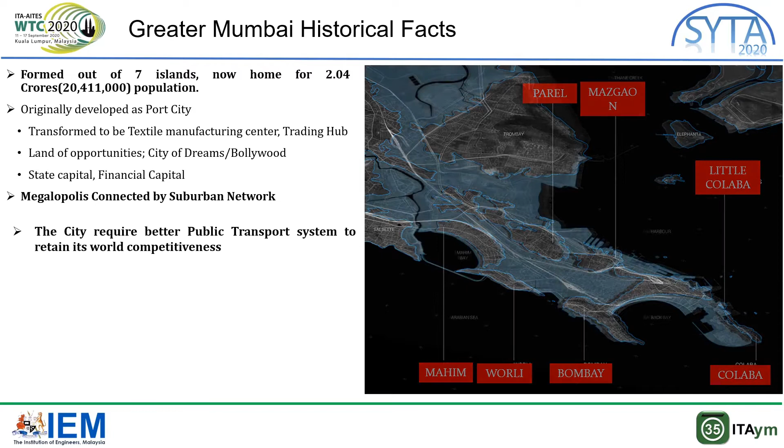Let's see the status of existing public transport infrastructure in Mumbai. Mumbai has a suburban railway network system with 465 kilometers of track length. 2,800 trains run on the system, serving 131 stations, supplemented by an integrated bus transport network system. The rail network carries around 8 million passengers every day.

Rail traffic has increased 7 to 8 times, but capacity has only increased 2.3 times, so the rail network is running over capacity by approximately 5 times. More than 2,500 people died and over 3,000 people were injured in Mumbai's suburban railway network, according to data compiled by Mumbai's Railways Police Commissionerate in 2019.

Similar condition is also seen in the road network system. There is a 56% growth in city's vehicle count from 2012 to 2017, approximately 35 lakh vehicles increased on the road. Hence, there is an urgent need for an international quality mass rapid transport system in the city.

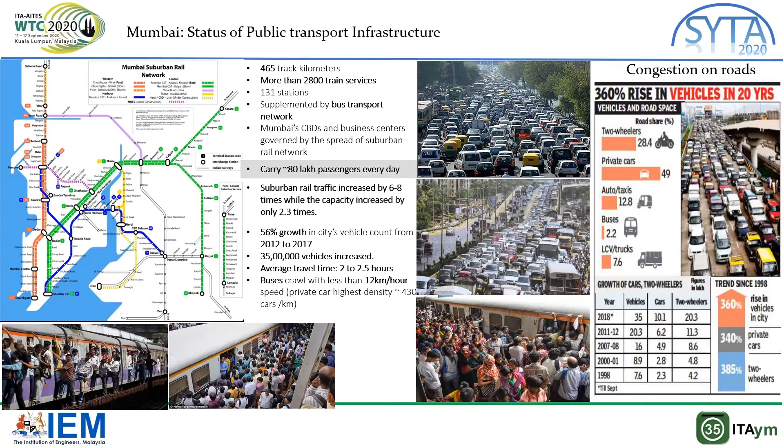Let's see the benefits. Connecting the unconnected is our motto in Mumbai Metro Line 3, as it connects all the major central business districts such as Nariman Point and Cuff Parade. It also connects areas which were not served by suburban railways. It will connect the airport, both domestic and international terminals, and will have interchange with existing public transport at various locations. Once Metro Line 3 is completed, it will connect 30 employment clusters, government and private offices, 12 educational institutions, 11 major hospitals, and 25 religious and recreational structures.

The most important benefit is environmental, as it is going to reduce traffic by 35%. There will be 4,56,771 fewer vehicle trips per day. There will be reduced fuel consumption, saving 2,43,390 liters per day. As per the study, there will be a reduction of air pollution by 2.61 lakh tons per year.

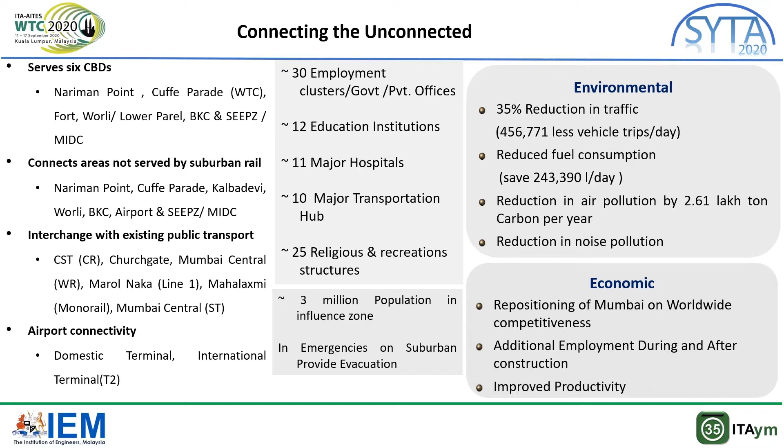Mumbai Metro region - the first picture on the left shows the plan for development of all metro lines proposed in the Mumbai Metro region. Only Line 1, Versova-Andheri-Ghatkopar, 11 kilometers, is in operation as of now. All other lines are in construction or planning phase. Once completed, there will be a total of 357 kilometers of metro track in Mumbai. The picture on the right shows the alignment of Mumbai Metro Line 3, which starts from Cuff Parade, Colaba, passes through Dadar, Worli, Dharavi, BKC, and ends in Aarey.

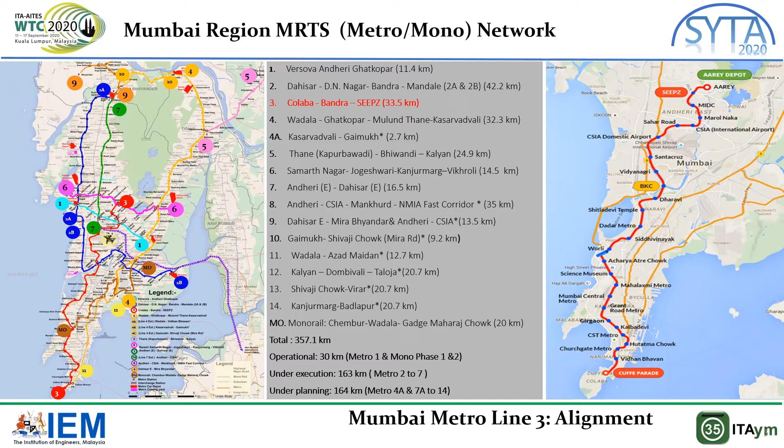Scope of work and project management: it's a 33.5 kilometer completely underground network consisting of 26 underground stations and one at-grade station at the depot in Aarey. Its civil cost is approximately 23,137 crores, out of which 57.2% is provided as a soft loan by a Japan bank, and the rest is contributed by the Government of India and Government of Maharashtra.

In December 2021, the first phase of the network, from BKC to SEEPZ, will be implemented, and the rest of the network by June 2022. We are expecting a ridership of around 14 lakh in 2021 at its starting.

Project management: we have a full in-house team of MMRC, and we have appointed a general consultant, which is a consortium of AECOM, Louis Berger, Egis Rail, and Padeco as engineer. And then there is a full team of contractors with detailed design consultant and design checkers.

We have divided the entire line into 8 packages, including the depot, consisting of 55 kilometers of tunneling using 17 different TBMs launched at 11 different launching shafts, internal and external. There are 26 underground stations, out of which 7 are off the road and 19 metro stations are below the roads, in which 7 stations are done using the NATM method and the rest will be cut and cover.

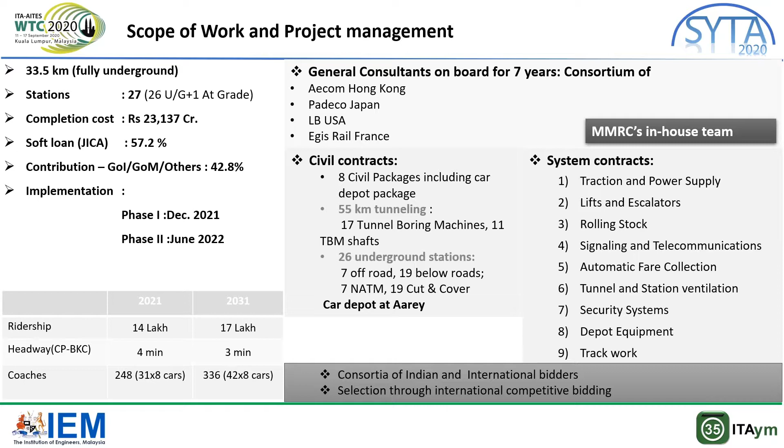The 7 packages have been awarded to 5 international bidders: L&T STEC JV, HCC Most Metros Troy JV, Dogus Soma JV, CEC-ITD-Tata Projects Limited JV, and J Kumar CRTG JV.

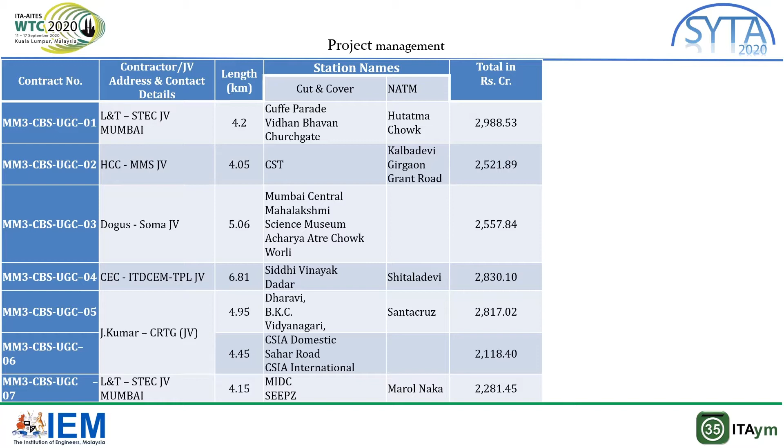According to Dr. Sreedharan, also known as Metro Man of India, this is the most difficult, most challenging, and technically the most complex metro project the country has undertaken. One should consider themselves lucky to be associated with this project.

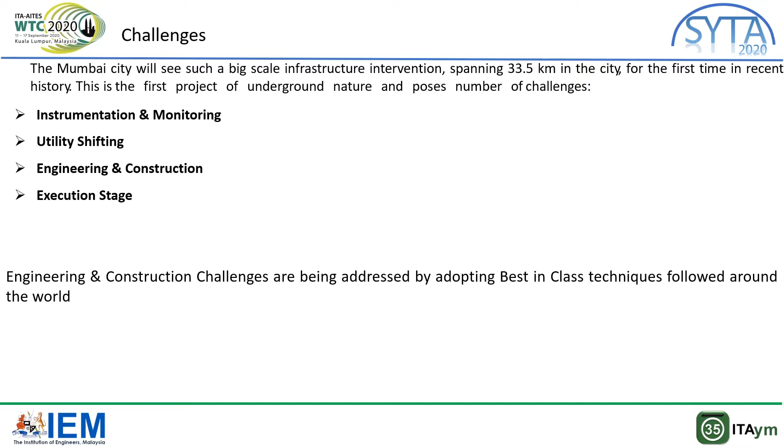Dr. Sreedharan has changed the face of public transport in India with his leadership. There are numerous challenges in the work in Mumbai. We will discuss a few challenges encountered by us. During the course of tunneling, numerous challenges were dealt with using the technical expertise available.

Structures above the ground were on average aged around 75 to 80 years, with maximum age of some structures being more than 120 years. So more than 3,000 structures were surveyed and are under monitoring for the line.

For instance, in package 2, out of a total of 1,004 structures in the influence zone of the tunnels, 51 were heritage structures, including places of worship. 28 were in severe condition, 238 were in very severe condition, as per building damage classification after Burland 1977. Around 120 structures were not granted permission for the building condition survey.

Most of the structures were in a dilapidated state, and the foremost challenge was to pass under these structures with varied geological conditions. Critical structures were supported and repaired to reduce the risk of collapse. We passed through a Ram Mandir, 200 years old, Saint Teresa Church, 270 years old, and 2 Parsi fire temples, all within a span of 4 kilometers in package 2.

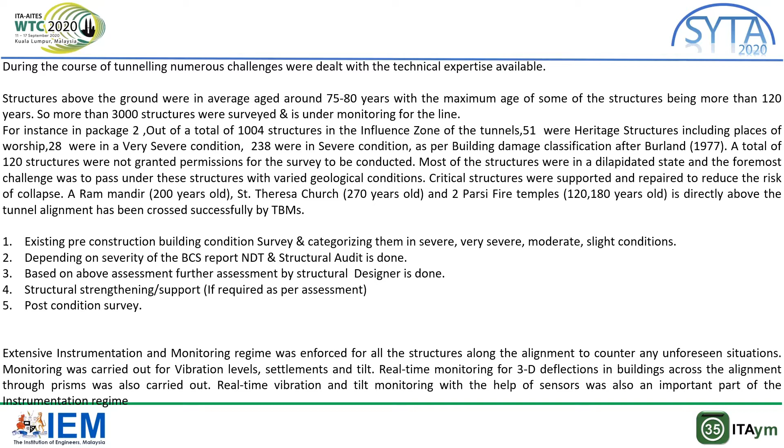Let us see this video.

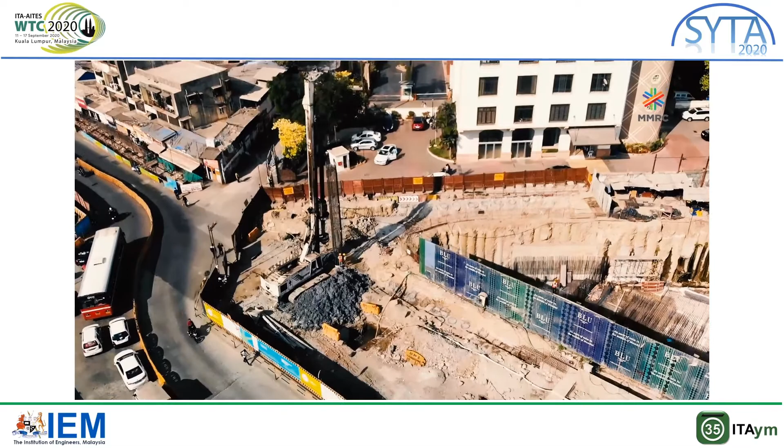As construction activities are in full swing, certain apprehensions were raised by the neighborhood community regarding safety of buildings in close proximity to station construction sites and tunneling operations.

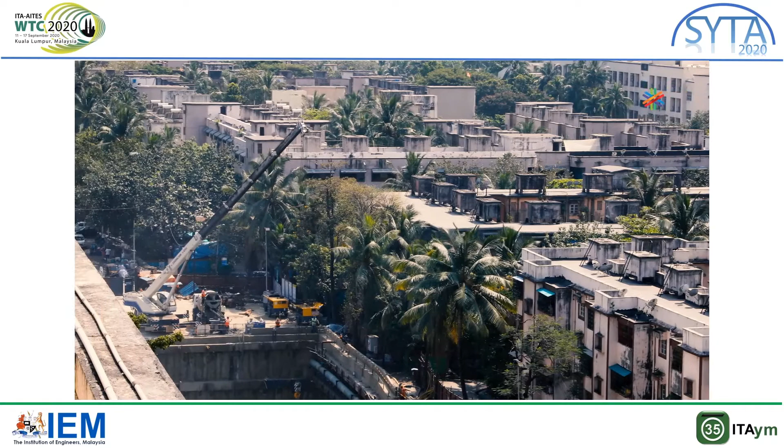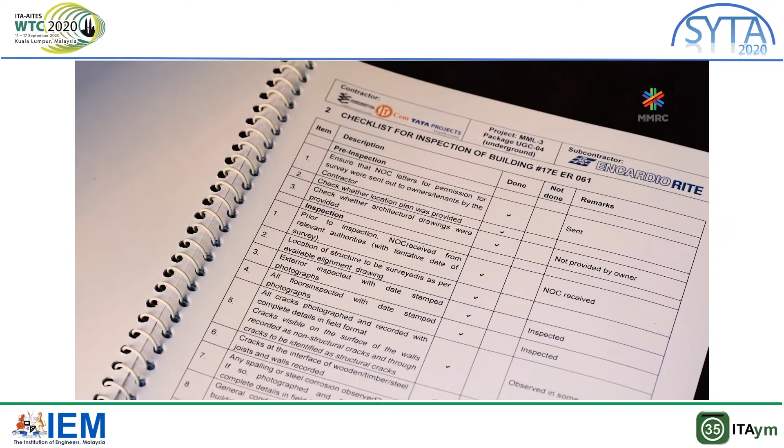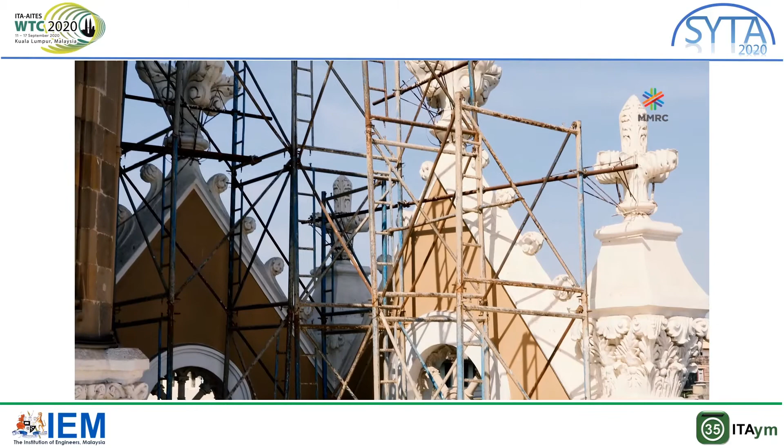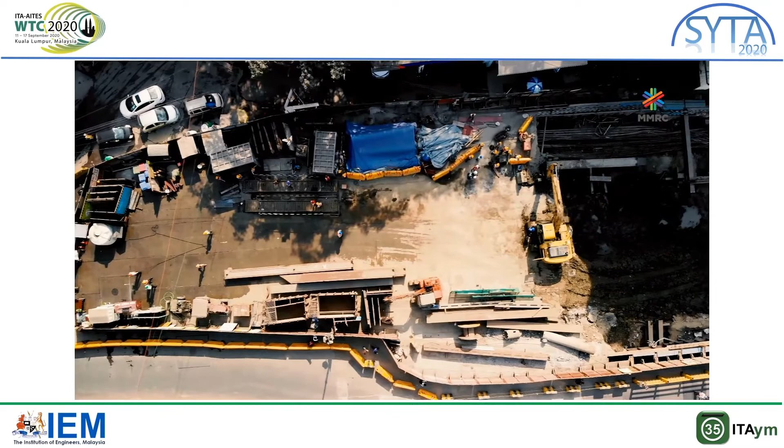Building Condition Survey, or BCS, was conducted by MMRCL before finalizing the construction standards and conditions of contract. The survey also facilitated categorization of buildings based on their conditions before the start of works. The BCS and vibration studies provided reasonable understanding of the vulnerability of structures to heavy construction activity in their close vicinity, and helped designers set permissible limits of vibration for all construction activities.

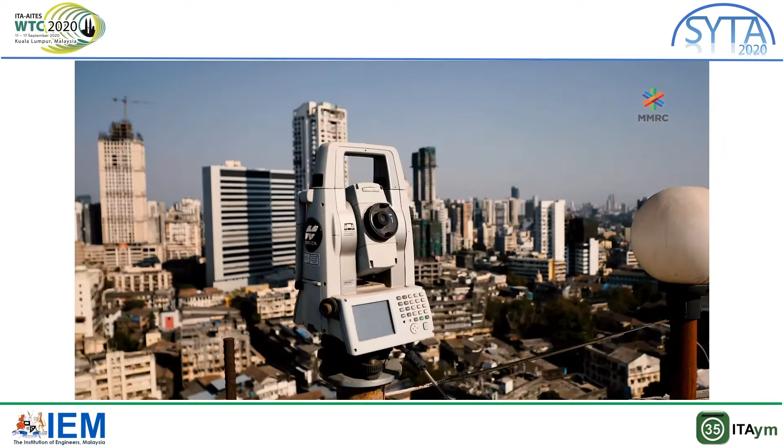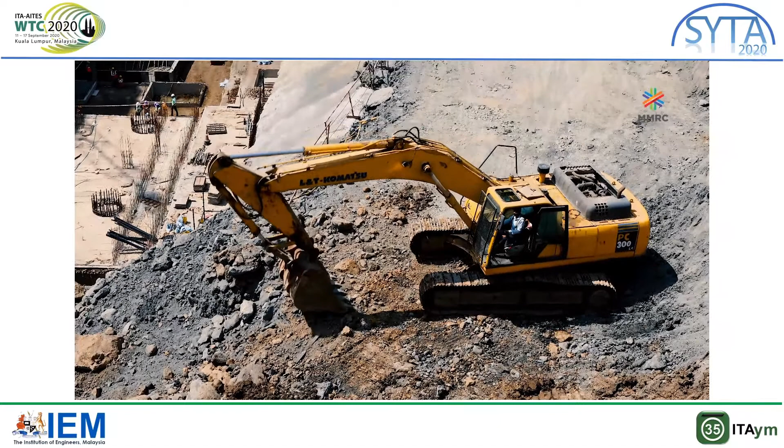Vibration levels caused due to various works are being continuously recorded by scientific instruments and regularly measured and monitored. Contractors are ensuring that tunneling and deep excavations for stations will not trigger limits set based on the condition of building categories. The total number of structures surveyed so far for Metro Line 3 is 2,790.

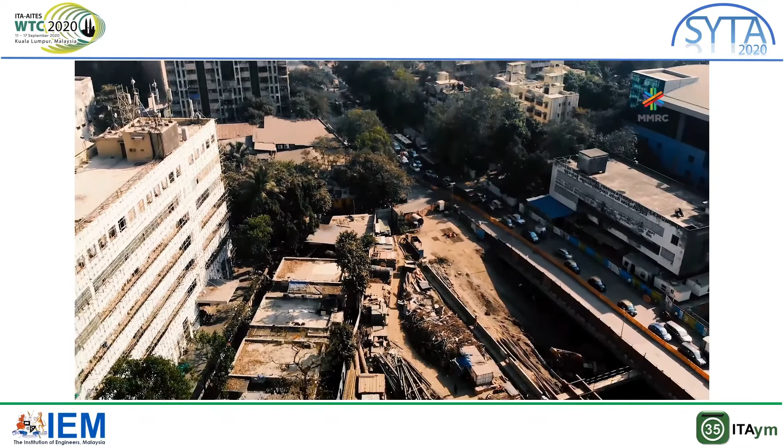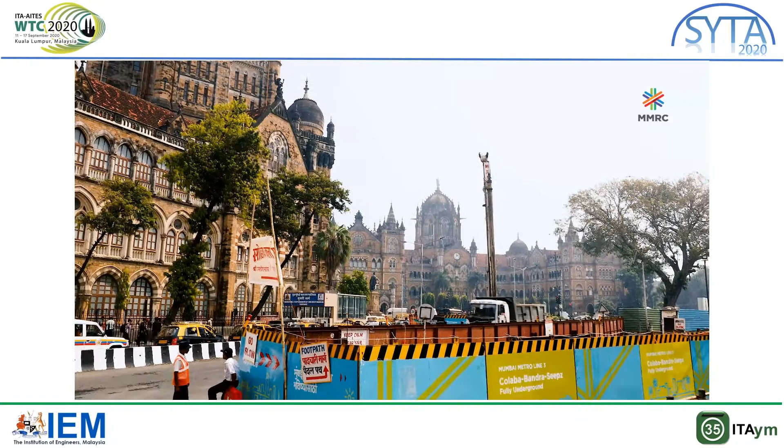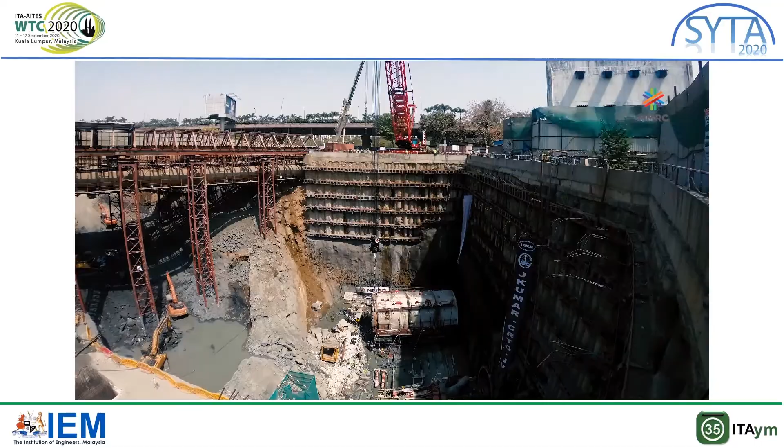24/7 online monitoring is carried out for weak and sensitive heritage buildings during the course of tunneling and station works. Also, when the TBM passes through any area, MMRCL monitors the adjoining buildings above ground for 24 hours, and even after the TBM has passed, it monitors the buildings for 3 months on a daily basis for any deformation.

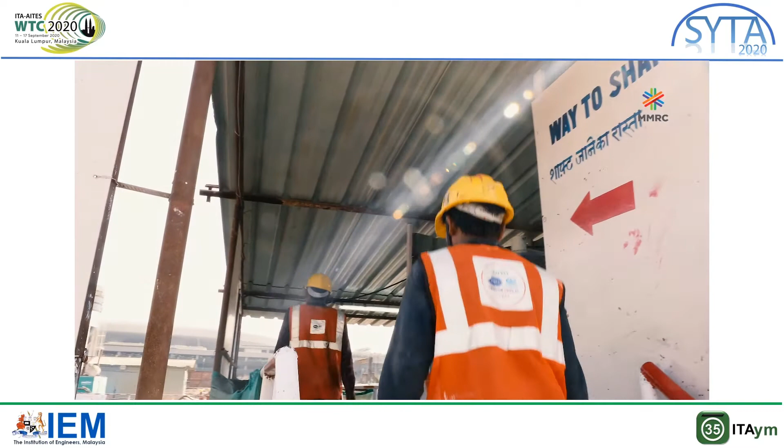Other than safety of buildings, safety of the workforce involved in tunneling operations is of utmost priority for MMRCL. It believes in Mission Zero Accident and is putting in all effort to make it successful.

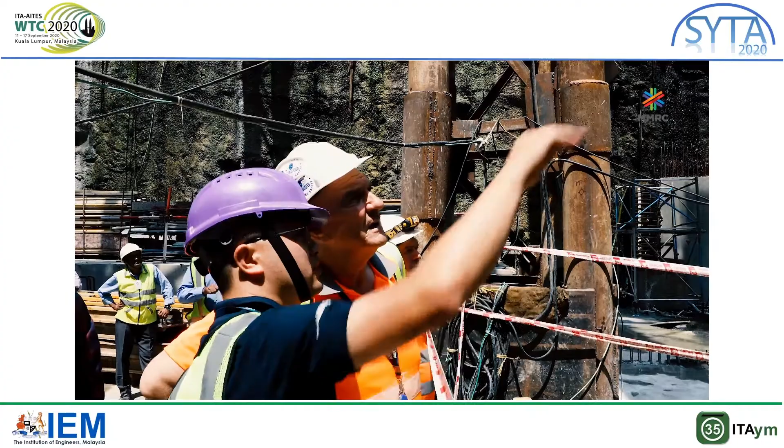All the construction sites of tunneling have a tally board system to accurately indicate the number and location of persons underground at all times. It provides all basic facilities like first aid kits and rooms, smoke and fire detection alarm systems, water sprinklers, and fire curtains.

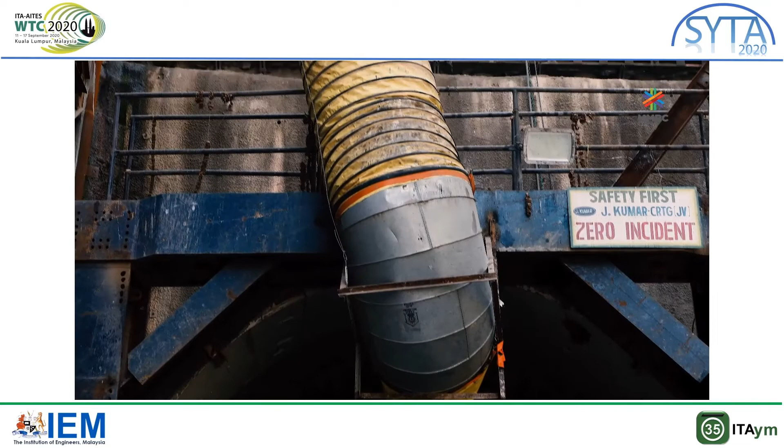To detect the presence of toxic gases, a gas monitoring system has been implemented inside the tunnel at intervals of every 4 hours. There is a ventilation system provided throughout the tunnel for undisturbed supply of fresh air in order to maintain 6 air changes per hour.

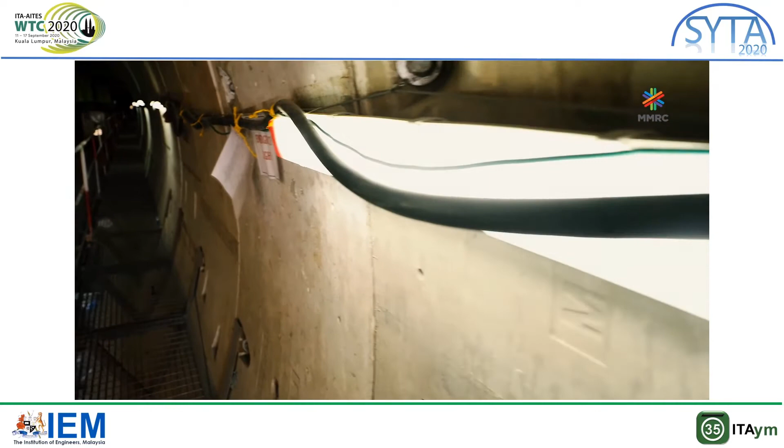Fire extinguishers are installed every 15 to 30 meters. Emergency lights are placed every 50 meters. For undisturbed communication, walkie-talkies and telephones are available every 100 meters. There are also closed-circuit breathing apparatus, or CCBAs, available at the emergency control room to handle fire emergencies.

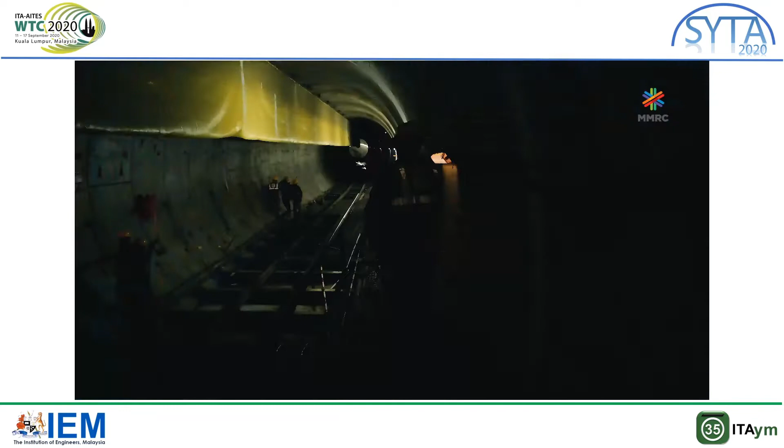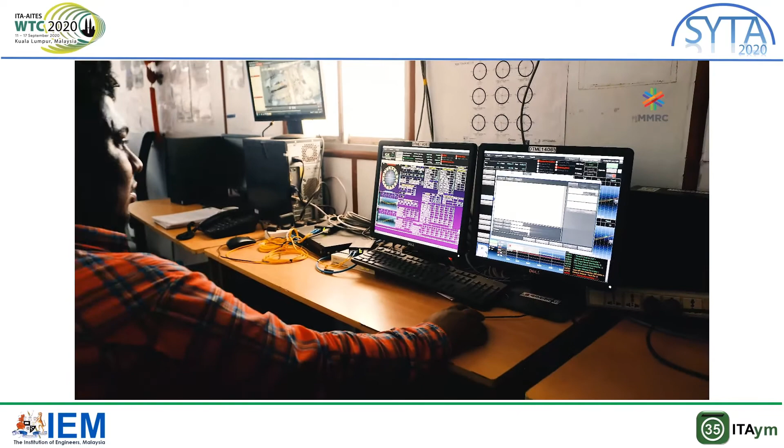The workable temperature inside the tunnel and around the TBM is maintained around 27 degrees Celsius. The authorities are also continuously monitoring the sites at the emergency control room through CCTV.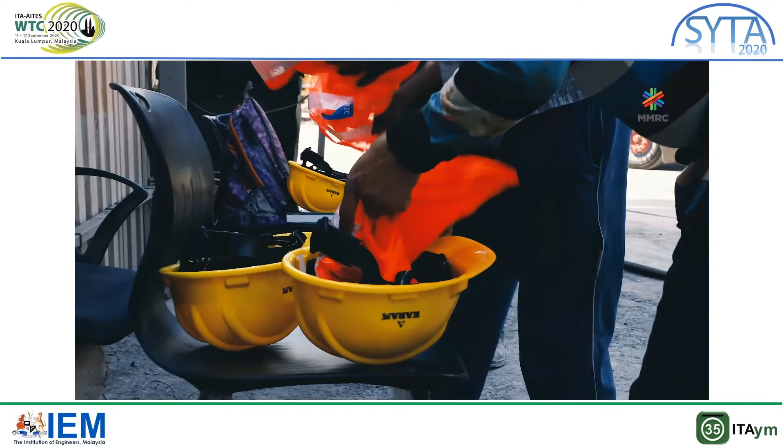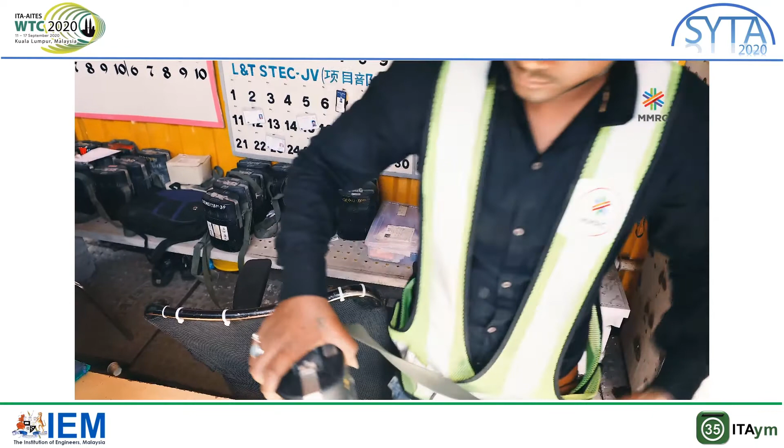In order to implement effective safety, workers are given proper training for specific jobs. Other than this, a 96-hour workers' safety training is mandatory for all workers, along with a pre-medical examination. Apart from this, various Indian standards provisions are in place in the project to achieve effective, efficient and reliable safety monitoring systems, such as IS 14775, IS 3775 and IS 14489, etc.

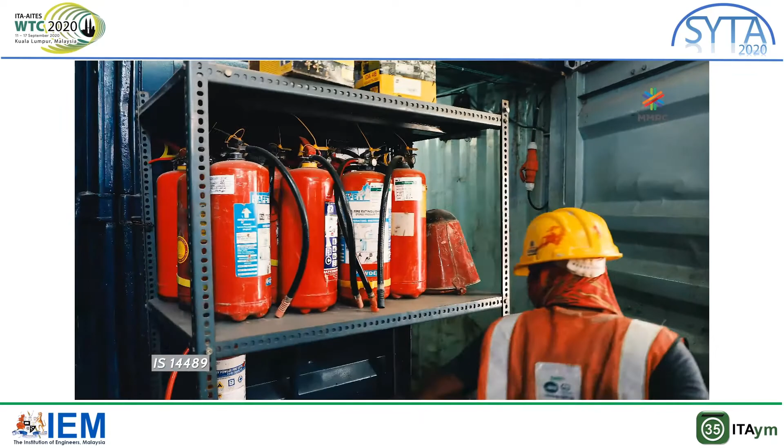Here are a few pictures showing structural support of existing buildings.

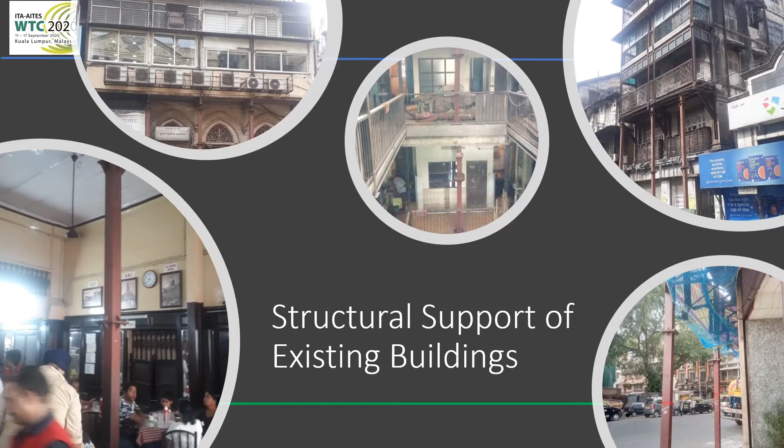Utility support, shifting and diversion is another major challenge encountered and tackled well. While making way for construction of tunnels and underground stations, many utilities have been encountered. These utilities belong to 25 different owners.

Water lines of different sizes, ranging from 12 mm to 2800 mm with pressure up to 70 bars. SWD 1200 mm dia to box of 3.6 into 3.6 meters. Gas lines 63 mm to 300 mm dia, and electrical cables and telecommunication cables were found.

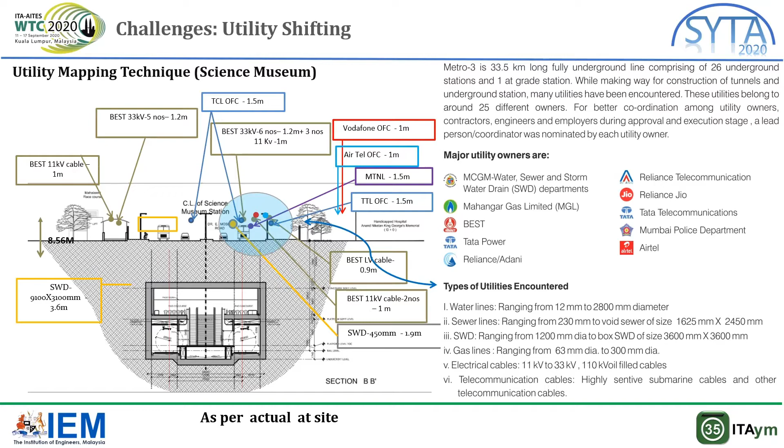Most of the stations are planned in existing roads. The gap between secant piles and property line are very less. Hence, most of the time, diversion of existing utilities could not be done. So the only option left is to support them in their existing position using support from decking or plunge column assembly.

For example, you can see the pic at right, of Grant Road metro station, where the construction line is just 2 meters away from the property line. So we hardly get any space for utility diverting.

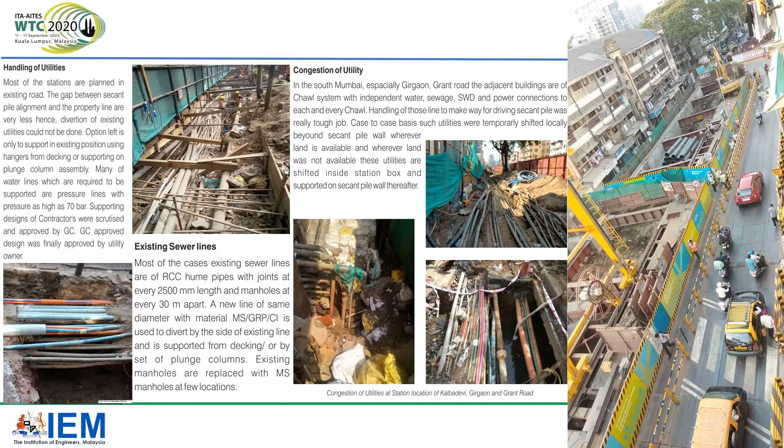Let's see critical utilities at Sahar Road metro station, and how we have supported them in their existing condition. Here we have a 2.7 meter dia MS water line, 44 years old and 70 PSL pressure; a 2.4 meter dia MS water line, 80 years old with 70 PSL pressure; two numbers of 1.45 meter dia water line, 44 years old with 40 PSL pressure; and a 0.6 meter dia CI water pipeline, 100 years old with 30 PSL pressure.

You can see in the figure the existing structures. In stage 1, we divert the traffic and install micropiles and king post. In stage 2, we install longitudinal girder on the king post with truss on the top of longitudinal beams.

In stage 3, we excavate till the soffit of the utility pipes and install the bottom cross beam of utility pipes. In stage 5, we excavate till the base slab soffit, as per the methodology approved. In stage 6, casting of the station box is done by bottom up approach, and then it's backfilled with support to the pipes. Decking will be removed and traffic will be reinstated as it was prior to the construction work.

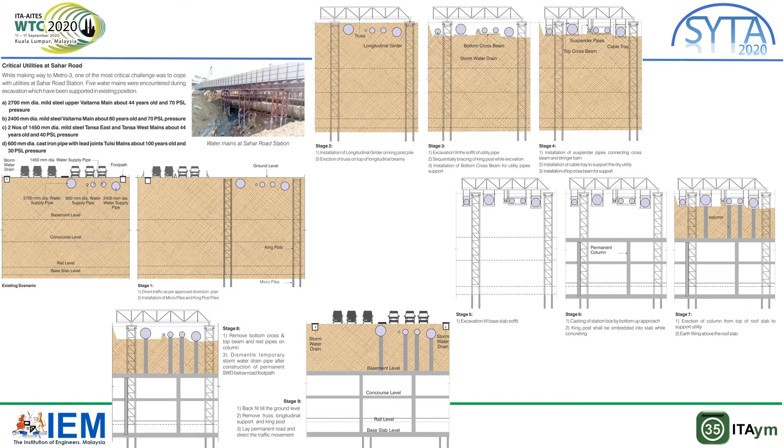Similarly, at Acharya Atre Chowk station box, we diverted the traffic. We installed the secant piles and plunge columns, then installed the traffic deck. We started excavation and supported the existing utilities on the traffic deck. Here are some pics showing the support of existing utilities.

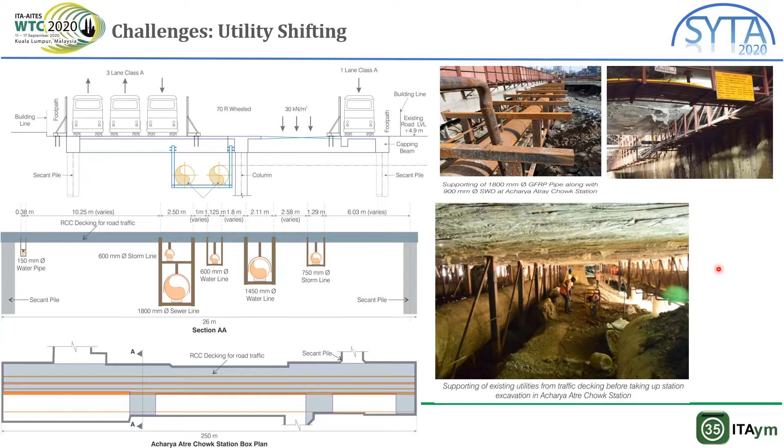Every station has unique challenges and unique resolutions. Now we'll talk about the tunnels. Here you can see 11 launching shafts from where 17 different TBMs were launched and relaunched. Till date, we have completed 85% of tunneling, approximately 46.5 kilometers of tunnel. We have used EPB, slurry, dual mode hard rock TBMs, and crossover hybrid TBMs manufactured by Robbins Terratec, Robbins NFM, Herrenknecht, and STEC.

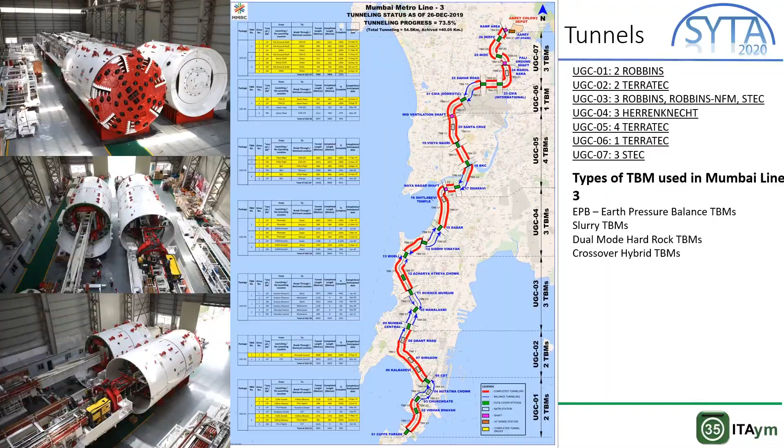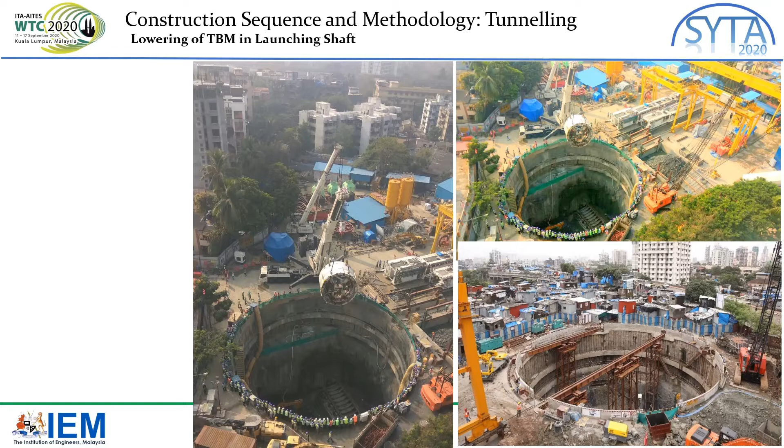Construction sequence and methodology: here you can see a few pics of a circular external launching shaft from where the TBM has been launched. These are pics of an internal launching shaft, which is part of a station, rectangular in shape, where the TBM is being lowered.

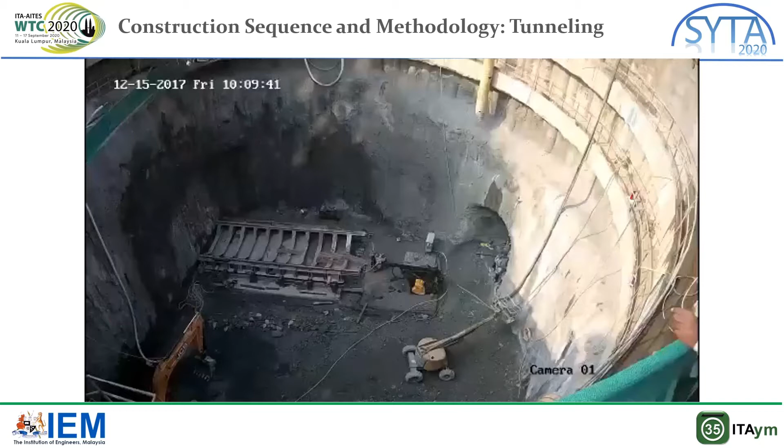Let us see a time-lapse video of TBM lowering and assembling of different TBM body parts: middle shield being lowered, front shields with cylinders, cutter head, manlock. Now TBM body assembling is being done: tail shield bottom part, erector, bridge, screw conveyor, tail shield top.

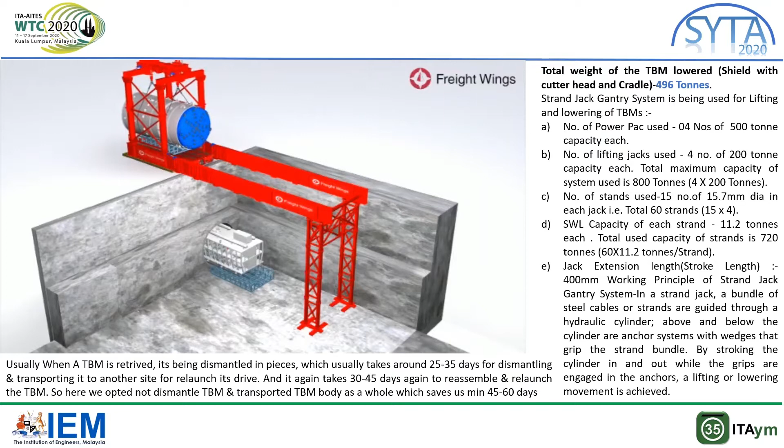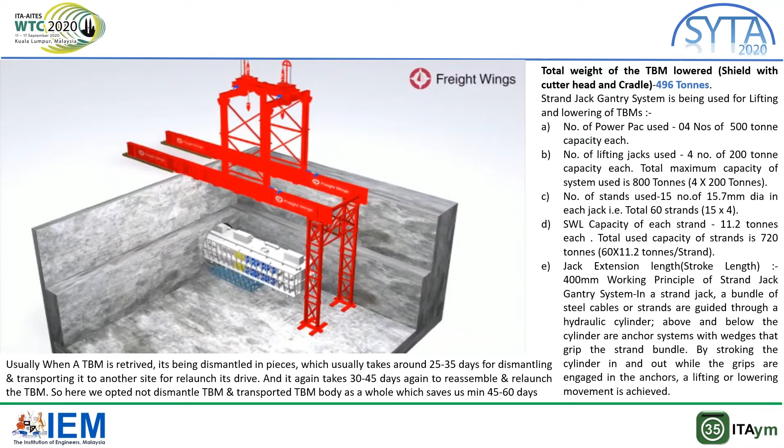So here we opted not to dismantle the TBM body and instead transported the TBM body as a whole, which saves us a minimum of 45 to 60 days. You can see the video of how it has been done. Total weight of the TBM lowered shield with cutter head and cradle is 496 tons, and it has been lifted by a strand jack gantry system in one go. So we have shaved around 45 to 60 days.

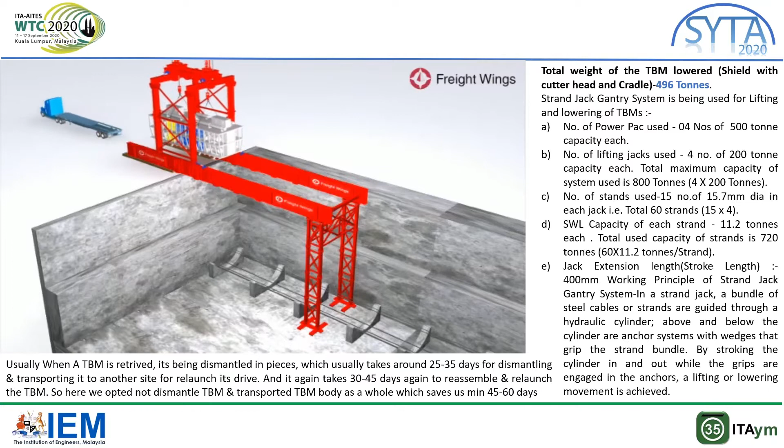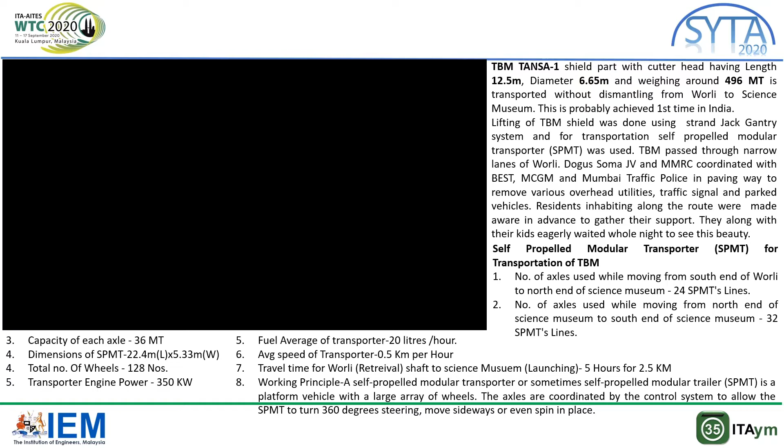Here are a few pics showing the same procedure, lifting a TBM body as a whole. The TBM shield part with cutter head has a length of 12.5 meter dia, 6.65 meter, and weighing around 496 metric tons, is transported without dismantling from Worli to Science Museum.

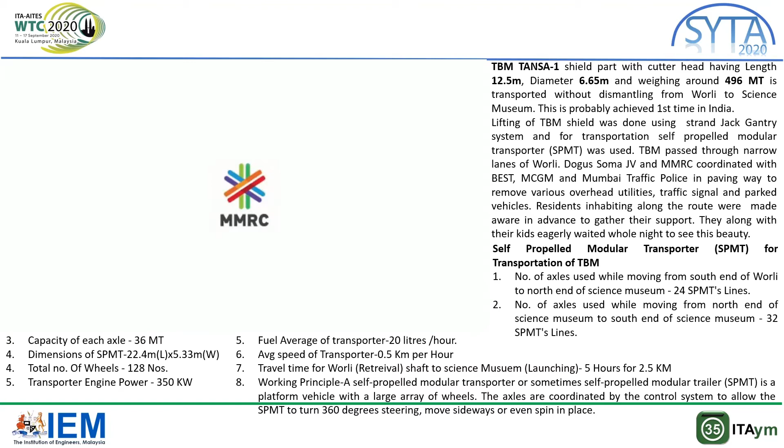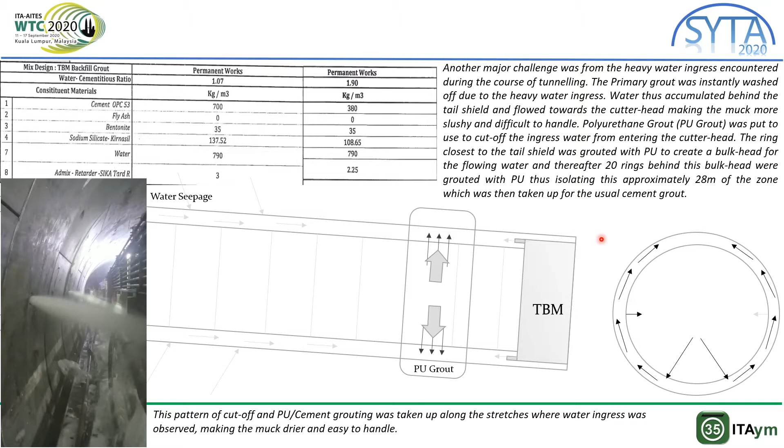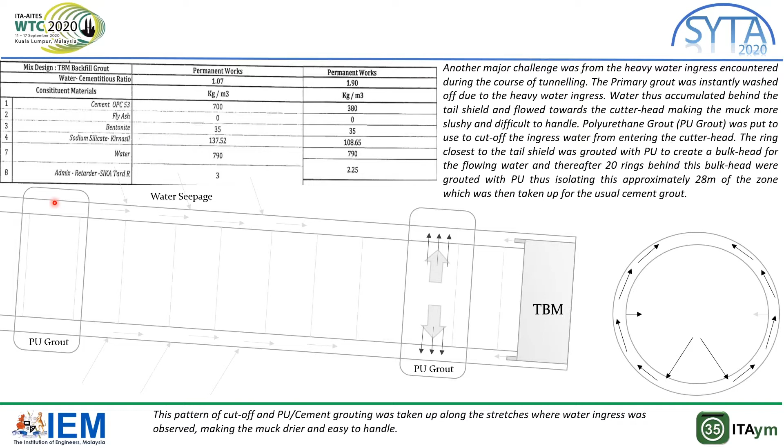Polyurethane grout, PU grout, was put to use to cut off the ingress water from the cutter head. The ring closest to the tail shield was grouted with PU to create a bulkhead for the flowing water, and thereafter 20 rings behind this bulkhead were grouted with PU, thus isolating approximately 28 meters of the zone, which was taken for the usual cement grout.

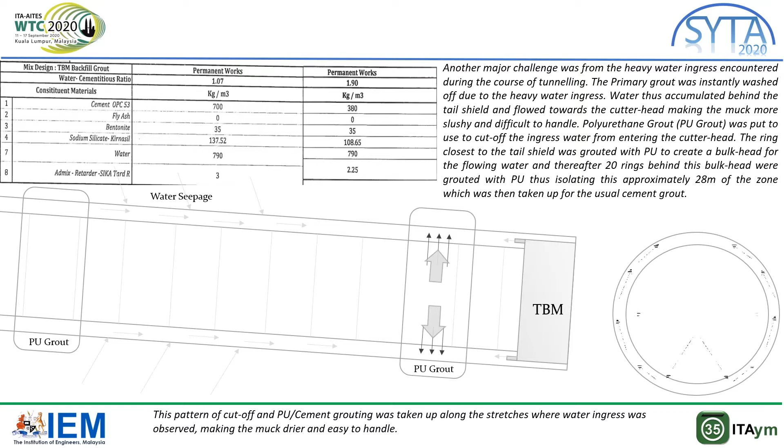Usually we were using 380 kgs of cement per meter cube for grouting. But for the area which is having higher water ingress, we have used 700 kg per meter cube for the tail skin grouting, and we have grouted in this manner, thus ensuring the water tightness of the rings.

So let's talk about stations. Metro Line 3 has 19 cut and cover stations. Method of construction is bottom-up construction method. It has 7 NATM stations in 4 structural forms. As in Mumbai there is very less space available, so every station has a unique design and unique construction methodology.

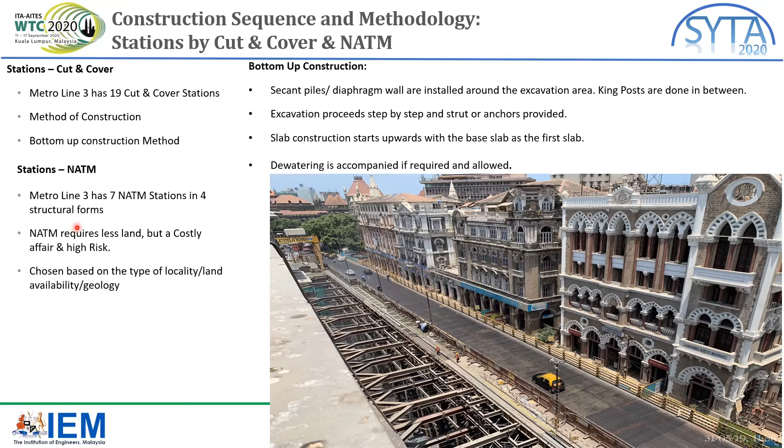We'll see one of the 4 structural forms of NATM station at Kalbadevi, where we have cut and cover shafts at either end. This is the plan, you can see the cut and cover box. This smaller circular tube is for the TBM tunnel. After the TBM tunnel passes, the tunnel has to be enlarged using NATM method. 2 boxes are there for the station, and these boxes will also be connected with the larger diameter tunnel using NATM methodology. So this station was very unique.

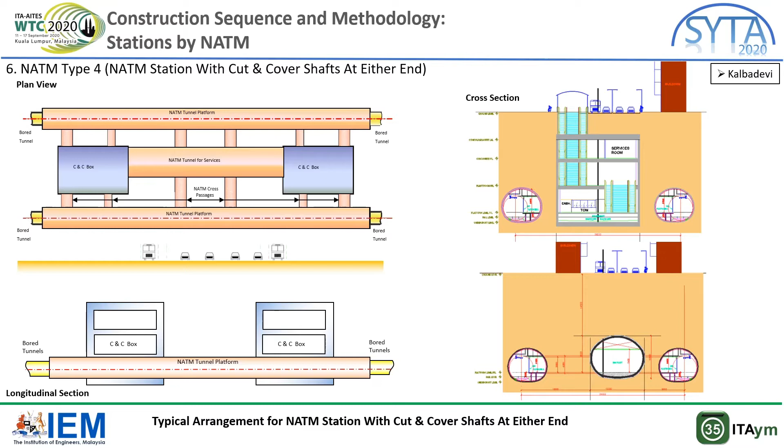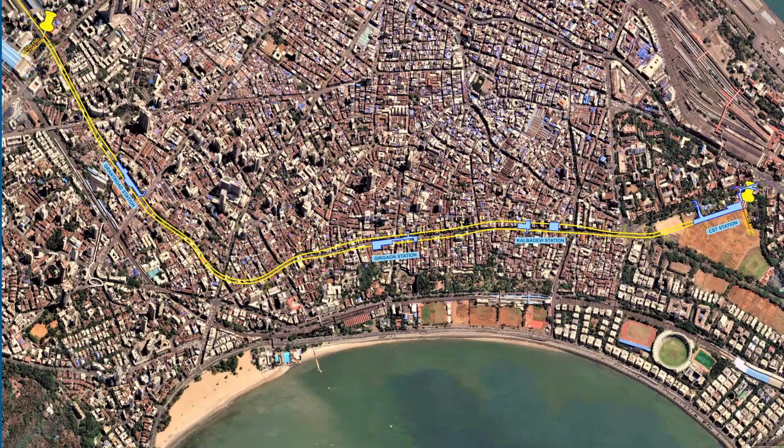Kalbadevi metro station, as you have seen in the previous slide, the Google image of the location. So we do not have any government land parcel in this area for carving out the metro station. So we have acquired 2 land parcels from private owners, and then we created 2 shafts from which it was planned to excavate and go below and start the NATM work for the station.

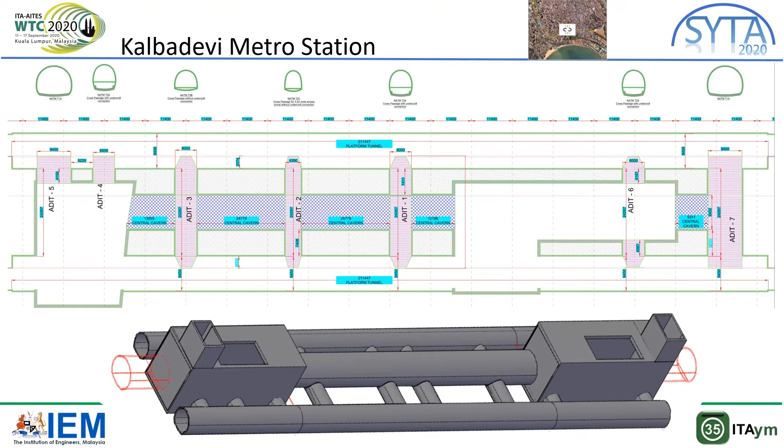But what happened, we were behind schedule in getting these land parcels from the private owners due to negotiations. So what we started, after the TBM has passed, we started excavating from the tunnel itself. This is how we have done it.

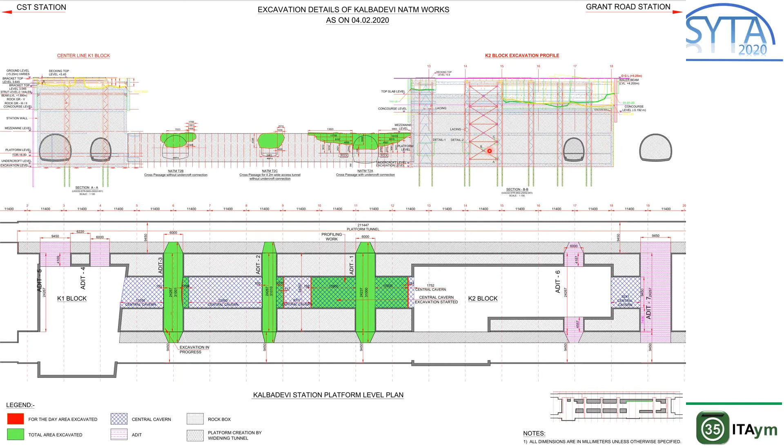So you can see here, these are the land parcels which were quite delayed. So after the TBM breakthrough of this line, we have started excavation from these adits. And once we went inside, we started connecting these adits for the central cavern. So in this way we haven't waited for the land parcel to be available, we started the construction work within.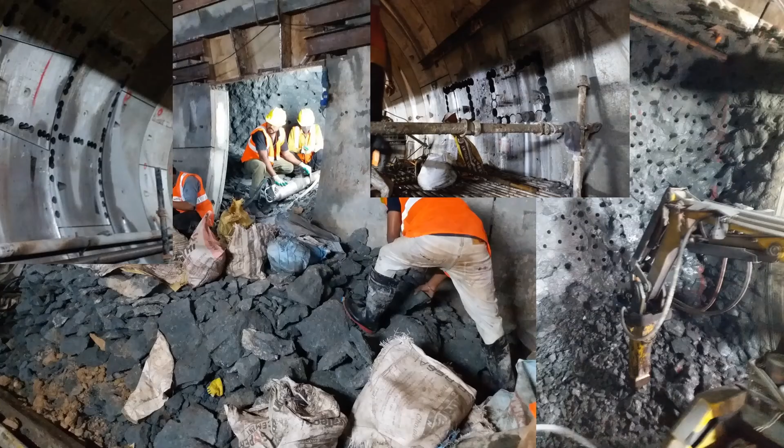This is how we do it. We drill core in the segments. We remove the segments, we support it, and then we move inside the segment. We drill, initially with hand drillers, then with the smaller Poclain, to create sufficient space for the drill and blast method.

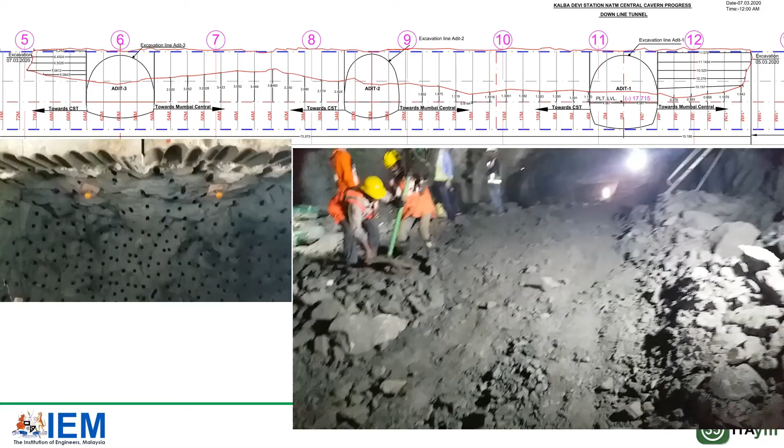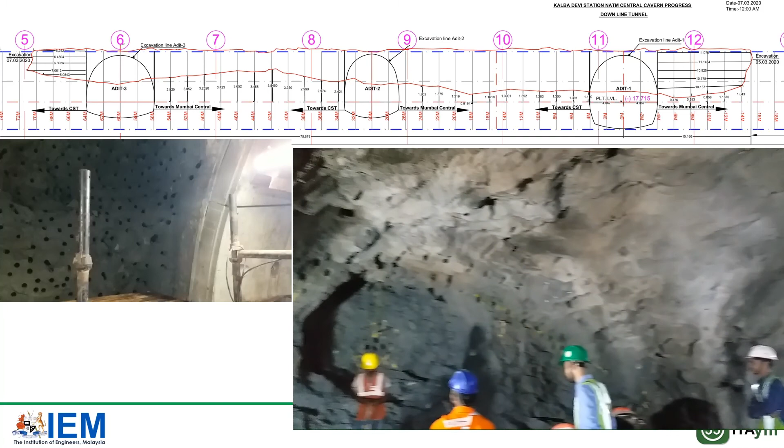Here you can see once the sufficient space is created, we use the drill and blast method. This is a view of Adit 1, from where once we went inside, we start excavating for the central tunnel. You can see the complete view from Adit 3 and excavation going on for the central tunnel.

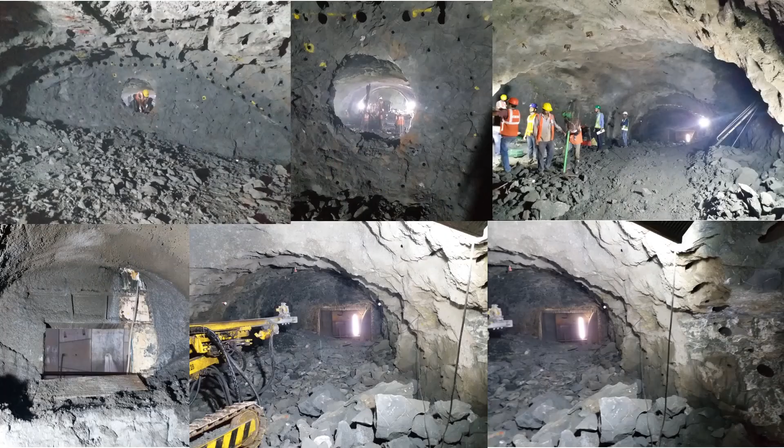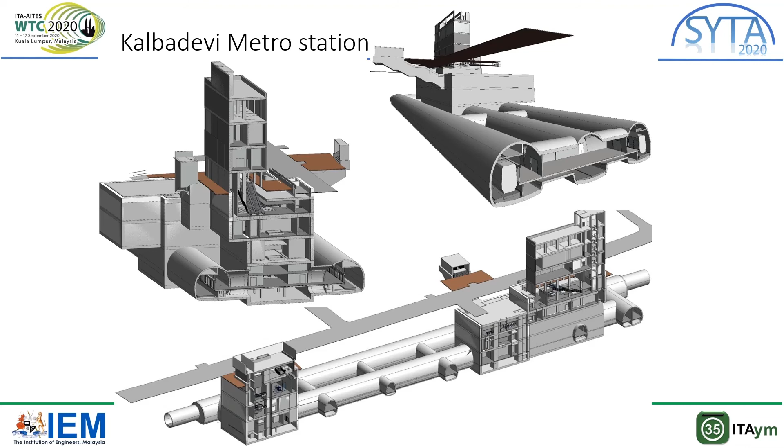These are a few pictures from the 3 adits. This is a BIM model view of Kalbadevi metro station, where you can see all the station boxes and the tunnels connecting them. Some more photos of NATM works in Line 3.

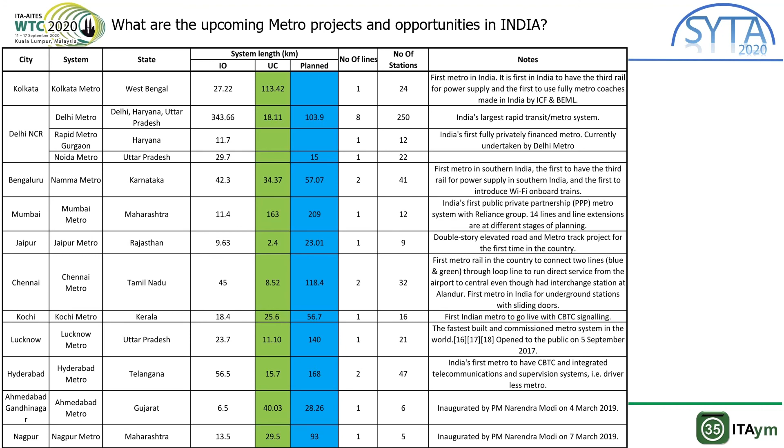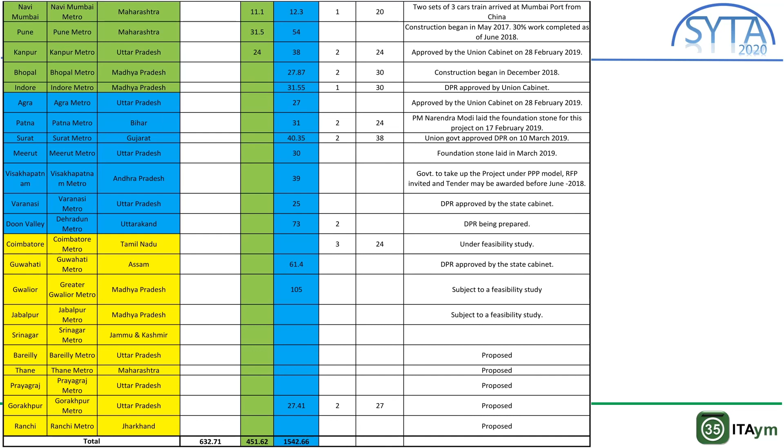What are the upcoming metro projects and opportunities in India? We are having around 632.71 kilometers of metro works in operation, 451.62 kilometers are under construction, and 1542.66 kilometers has already been planned or approved. So in coming years, we'll be having this much amount of work in India.